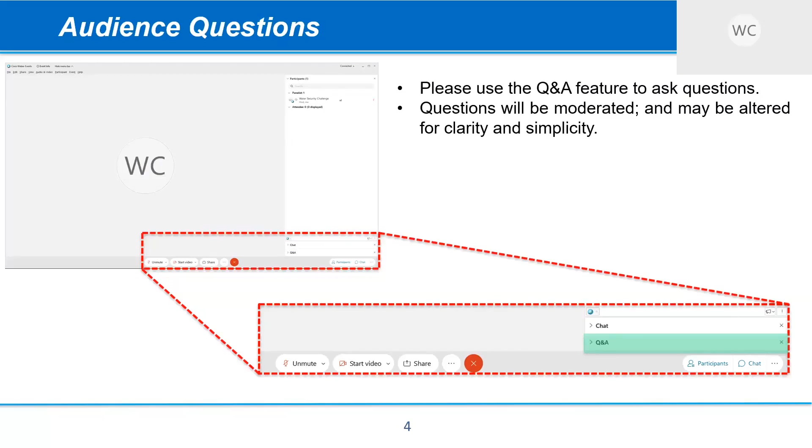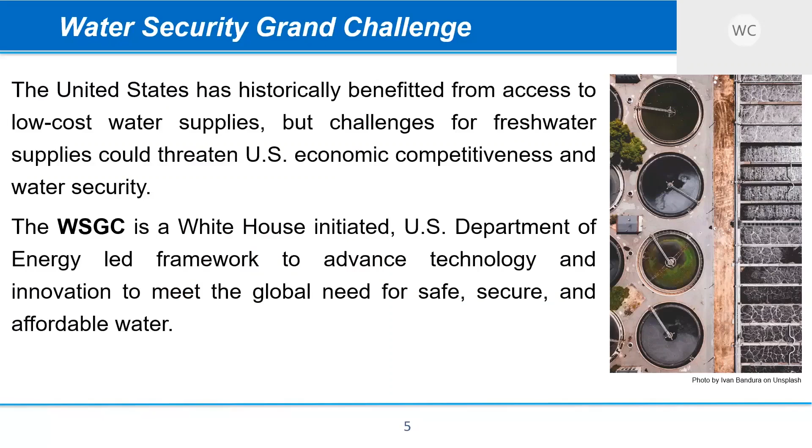Briefly, the Water Security Grand Challenge: the United States has historically benefited from access to low-cost water supplies, but challenges for freshwater supplies could threaten U.S. economic competitiveness and water security. The Water Security Grand Challenge is a White House-initiated, U.S. Department of Energy-led framework to advance technology and innovation to meet the global need for safe, secure, and affordable water. Using a coordinated suite of prizes, competitions, early-stage research and development, and other programs, the Grand Challenge has set goals for the United States to reach by 2030.

Those goals include cost-competitive desalination technologies, transforming produced water from a waste to a resource, reducing water impacts at new and current thermoelectric power plants, doubling the resource recovery from municipal wastewater, which is what we'll be discussing today, and development of small modular energy water systems.

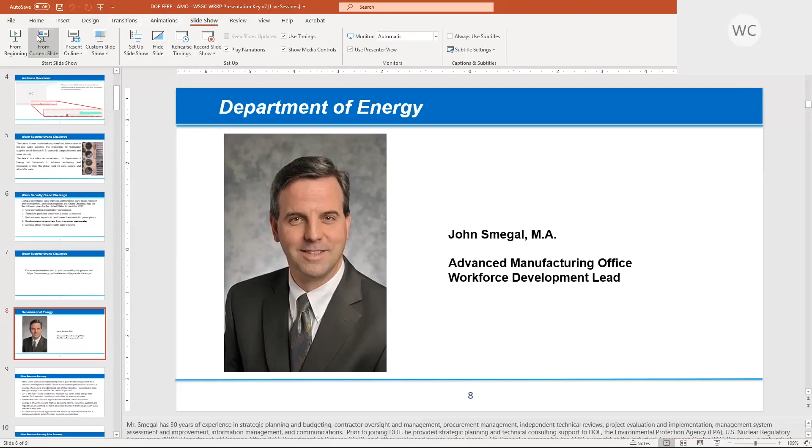Okay, just a second, I believe I have lost partial control from current slide. Apologies, I am having a little bit of technical difficulties. Oh, weird, apologies, just one second. My computer is not allowing me to pass keyboard control. William, if you can't give me control, I can just say advance if that works. Oh yes, that's actually a good solution. I apologize. All right, that works for me, I don't mind.

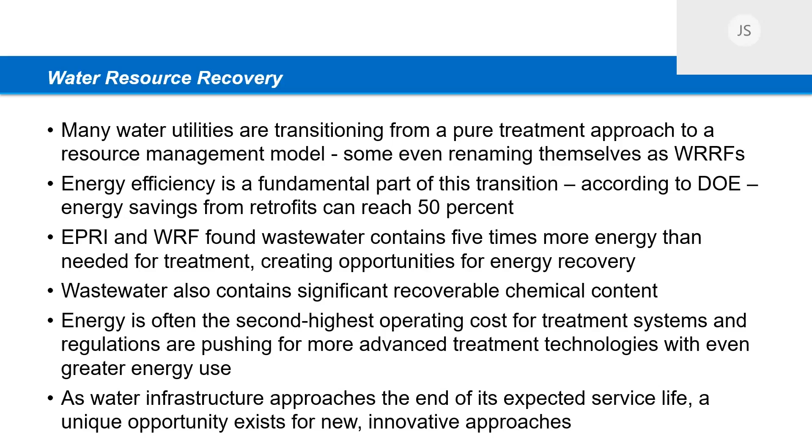Next slide, please. Okay.

The Water Resource Recovery Prize, as you all know, has 2 phases. We've just completed the first one, and that's why you're all here. The first phase is really a conceptual component, aimed at developing a library of solutions—10 winners that can potentially be leveraged or replicated in other settings. Phase 2, which is just getting underway, is more of a demonstration of these technologies, providing an enhanced menu of options aimed at reinforcing and capitalizing on previously discussed emerging trends within the industry.

The prize is looking at small and medium-sized facilities, and this competition has been unique in that it's beyond purely technology-based. Technology is the core of everything, but it's about expanding the technological feasibility outside the fence line of the facility itself. So we're talking about bringing in teams that represent all of the stakeholders, including downstream demanders, utilities, agricultural interests, municipalities, engineering firms, and universities. All of these were desired components of this phase 1 competition.

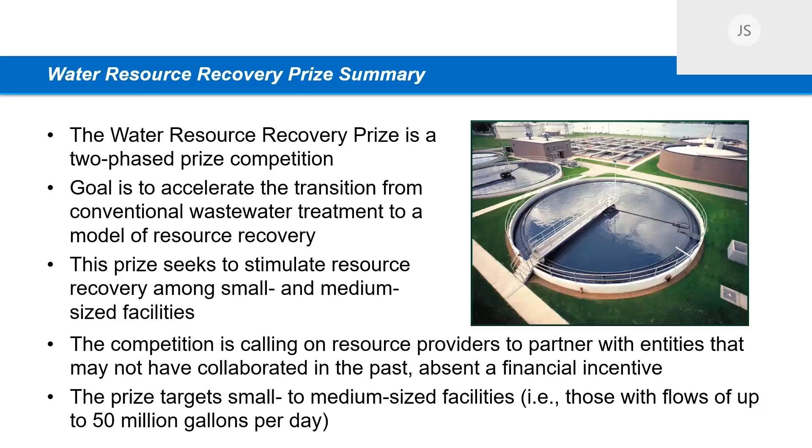All right, next slide, and this is my last slide. As you all know, we're right at that junction. We've gone through phase 1. COVID admittedly caused some delays in how we did this, but we're doing the best we can. So the timeline may be a little more delayed than originally envisioned, but right now, here we are in September, and we've passed that junction, moving toward phase two.

The phase two rules were released, I believe, on September 9th, and we're looking forward to a good process for the upcoming year. And at this point, I am going to turn it over, William, to whomever is next. Thank you, John. Much appreciate it.

Okay, next up we have Lauren Greenlee.

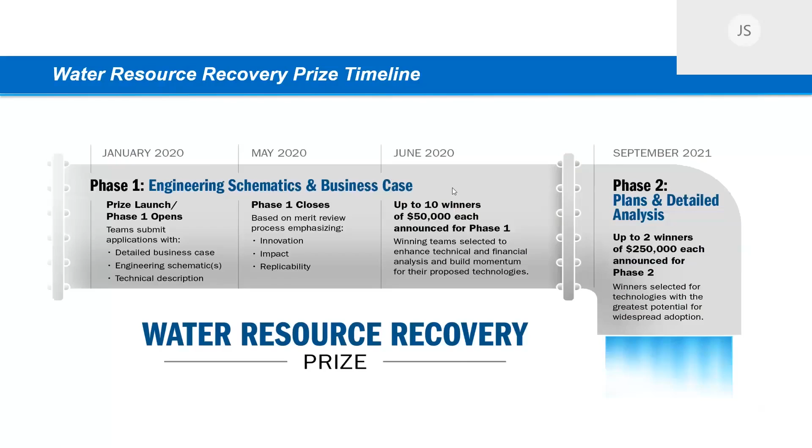I am finally able to pass over controls. Just one second. Okay, I think I have control. Let's see. Any luck? No, neither with my mouse or keyboard. Huh, okay. Oh wait, I think you now do. Oh no, I do. Okay, great.

Great, well thanks. It's exciting to be here as a phase one winner and to talk about my team and the technology that we're focusing on. So our technology is an electrochemical technology where we're focused on recovering fertilizer from nutrients as well as fuel and energy and water.

So the problem that we are focused on is the fact that in our current municipal wastewater facilities, phosphorus and nitrogen compounds come in the wastewater and are lost, either released to the environment or removed because they've been considered contaminants—really similar to what John was saying. So we've spent the last few years rethinking phosphorus and nitrogen as critical nutrients that we spend a lot of energy and money making into fertilizers, and then they're just lost to wastewater.

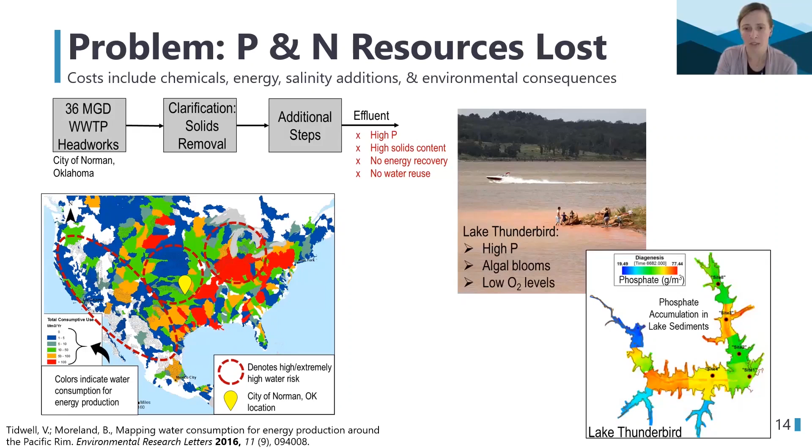So we're focused on the city of Norman in Oklahoma as our test case, and you can see in the slide I have a map here that shows water consumption across the U.S. for energy production, and also areas in the U.S. that have a high water risk right now—the city of Norman is in one of those areas.

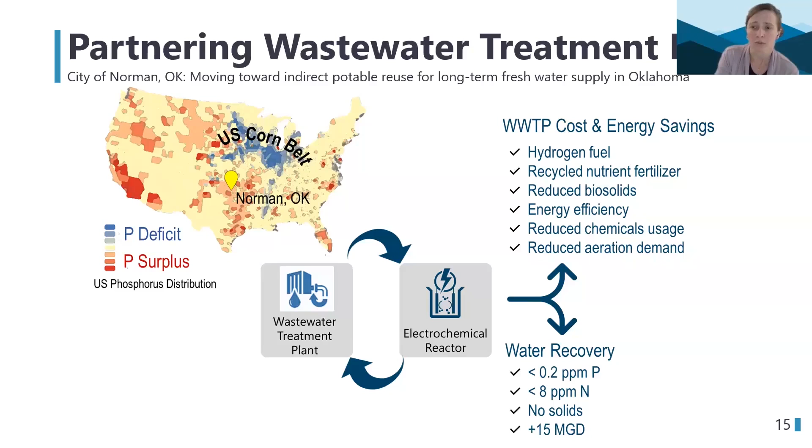So a little bit more about Norman. They are an aging wastewater treatment plant looking to upgrade, considered a medium-sized wastewater treatment facility in the central U.S. where there's a surplus of nutrients that would be good to recover, both phosphorus and nitrogen. We see a lot of benefits for our potential technology in terms of water recovery, and also cost and energy savings. I'll talk more about that in terms of resources recovered.

Other significant benefits of our technology are that we also produce hydrogen, which can be recovered as a fuel during our electrochemical process. Because we use electrochemistry, we replace the need for chemical addition typically used for nutrient removal. So we're reducing added salinity that's typically added to remove nitrogen and phosphorus in more traditional approaches, and we also reduce overall chemical usage as a cost to the wastewater treatment plant.

And certainly another huge benefit is that we're going to be enabling a huge recovery in treated water for indirect potable reuse for the city of Norman as a new drinking water source.

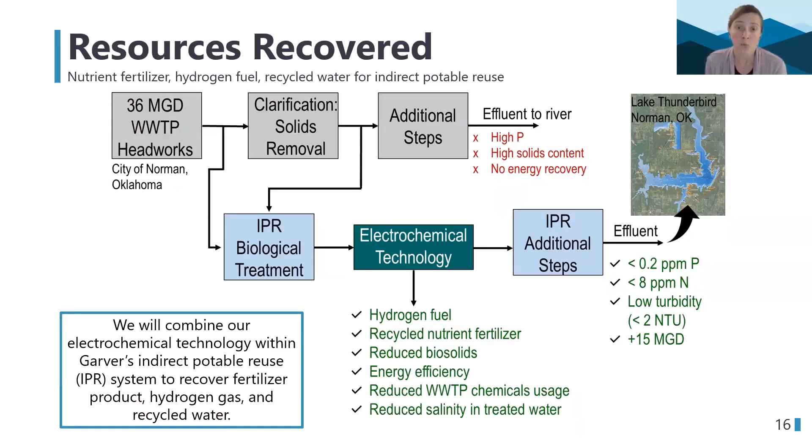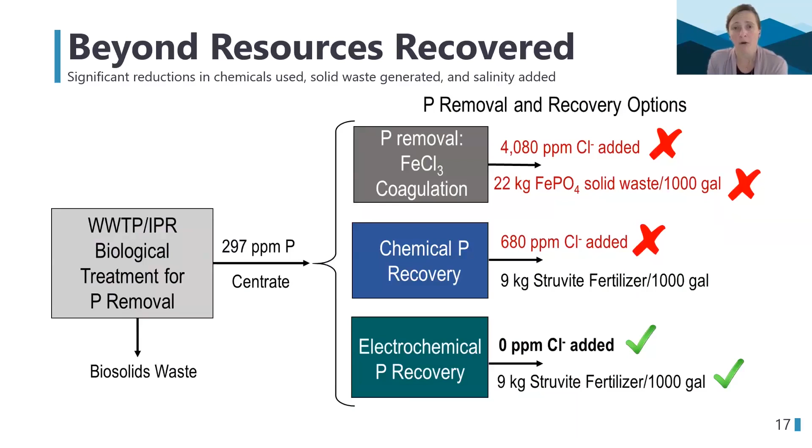Just a little bit about our team. I am the team lead, co-founder and CTO of Catalyze H2O, a startup company looking at transitioning this technology out of our research lab. I'm also a professor at the University of Arkansas, where we originally developed this technology at lab scale.

My co-founder for Catalyze is Shelby Foster. She's the CEO and will be leading business development and the market business plan. We are partnering with Mike Watts and Sean Skouras from Garver, consulting engineers directly involved with the City of Norman and their indirect potable reuse project. We're also partnering with Chris Mattingly, Director of Utilities for the City of Norman. We'll be working closely with all team members for phase 2.

And with that, a huge thank you for listening, and I look forward to any questions.

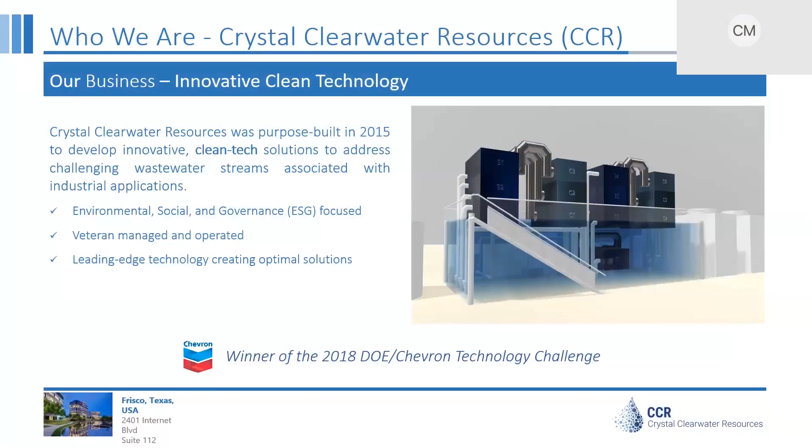Good morning, my name is Casey McKinney, VP of Operations, and I'll be presenting today for Crystal Clearwater Resources. CCR is a veteran-managed company purpose-built in 2015 to address some of the most challenging issues related to wastewater treatment across multiple industries. We help companies fulfill the environmental aspect of their ESG standards by creating optimal solutions through leading-edge clean technology.

CCR's proposal is in partnership with Ramona Municipal Water District, Dudek, and Southern California Alliance of Publicly Owned Treatment Works, or SCAP. CCR proposes using our patented low-temperature distillation, or LT-DIST, technology to improve upon multiple aspects of the existing resource recovery process. Integrating our technology will increase the amount of recovered water available for reuse by nearly 100%, and reduce current disposal volumes by approximately 90%. This reduction will eliminate an estimated 17,000 truck miles per year, significantly reducing the risks and environmental impact associated with transporting brine to the Point Loma ocean outfall.

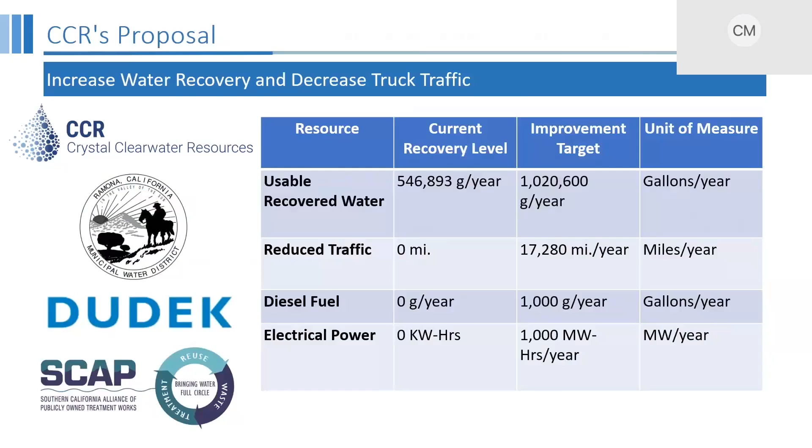The San Vicente wastewater treatment plant currently utilizes reverse osmosis, or RO, as a component of their treatment process, which recovers approximately 550,000 gallons of reusable water per year. Integrating LT-DIST technology into the current treatment process will concentrate the existing RO waste stream, providing increased water recovery and decreased disposal volumes. This will result in lower disposal costs and lower greenhouse emissions from the disposal process.

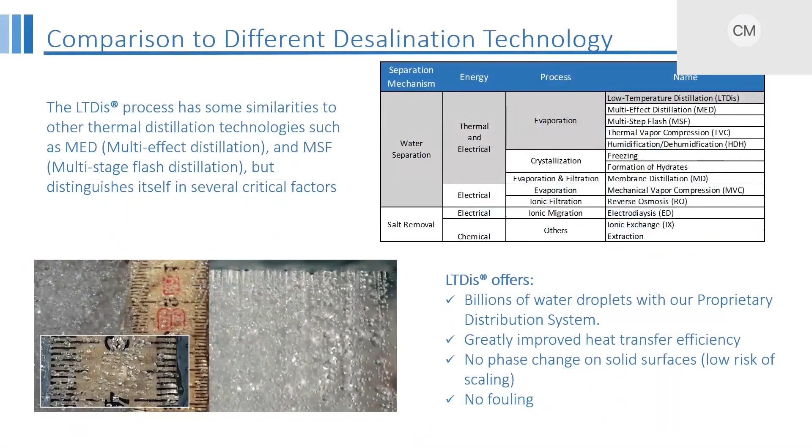Our proposal also requires a microturbine generator to drive the thermal process, which will provide all the required electricity for the LT-DIST plant. Excess electricity can be used to augment a portion of the electrical demand from the existing treatment process. What differentiates the LT-DIST technology is that the phase change in the evaporation process occurs on billions of water droplets instead of tube bundles or membranes.

With no phase change on metal surfaces, this virtually eliminates scaling and fouling risk within the plant. Additionally, the droplets in the condensation process allow for more efficient heat transfer.

Our technology operates under vacuum and is tolerant to fluctuating wastewater streams of up to 300,000 parts per million, requires little to no pretreatment, and operates efficiently under both full and partial load conditions. CCR's plants can utilize various heat sources ranging from conventional boiler systems to both low and high-grade waste heat to drive our thermal process.

LTDIS is a step change technology from existing thermal distillation processes that promotes seamless integration between other wastewater resource recovery facilities. Plant size can be scaled up or down to meet a facility's requirements. Our vertical design and lack of tube bundles allow for a significantly minimized footprint, making LTDIS ideal for smaller applications where space is restricted.

The standardized and modular design allows operators to be familiar with the systems across multiple facilities. Our technology augments an already robust system by allowing standardization in maintenance, personnel training, and plant equipment and supplies.

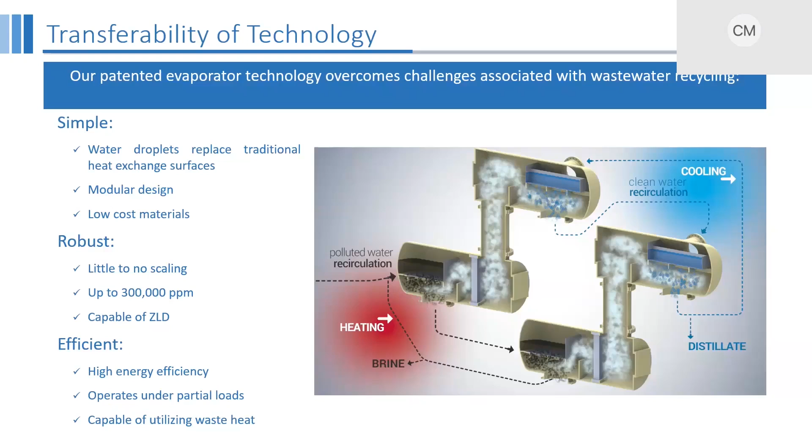While not economically viable at a location the size of the San Vicente facility, integrating our patented low temperature drying, or LT Dry, technology with our LTDIS system, we can achieve zero liquid discharge, or ZLD. Combining these two technologies eliminates the need for brine disposal, resulting in a full separation of water and solids and potential recovery of other valuable minerals for reuse.

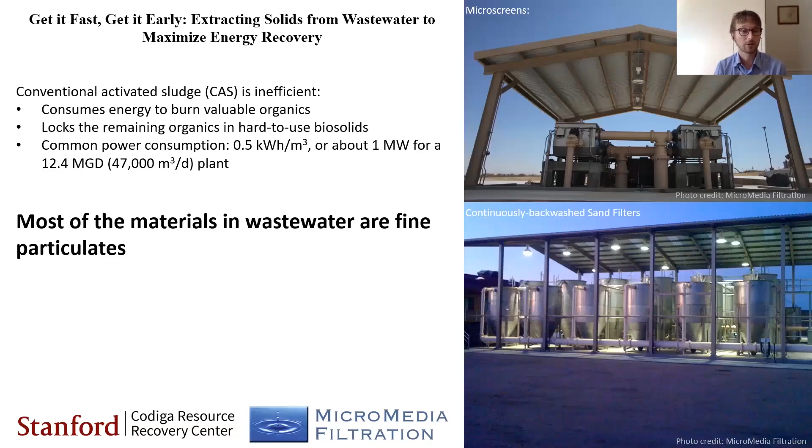Our approach that we're pioneering here is to really aggressively remove particulate matter from the wastewater upstream as soon as you can, essentially. Hence the name, get it fast, get it early.

We're relying on two processes to do that. The first is this process you see on the left, called a microscreen. For wastewater professionals, that's a machine similar to a gravity belt thickener, but you use a screen with a porosity that can vary, though up to 300 microns is typical. The water filters through the belt, and you intercept the solids, which form a mat on the screen that promotes even greater filtration.

You can extract the solids and dewater them, while the water flows on to the next process, a continuously backwashed upflow media filter. In this system, water flows continuously up through a bed of sand, while the sand is constantly flowing down. This allows us to continuously clean the sand and achieve essentially optimal filtration throughout the process.

These sand filters were previously certified in the New York City watershed as achieving equivalency to microfiltration, so you can achieve a very high degree of filtration upstream of your process, which makes everything else simpler and more energy efficient.

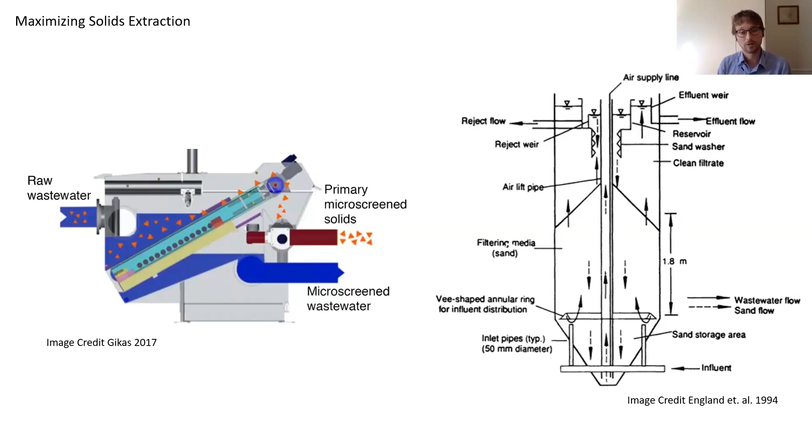To show the full process flow diagram on the next slide of a typical treatment plant, you'd have your wastewater coming in with bar screens, grit removal, and then a primary clarifier, which achieves about 50% typical solids removal. So you're still sending a lot of solids into your biological treatment process that still need to be removed.

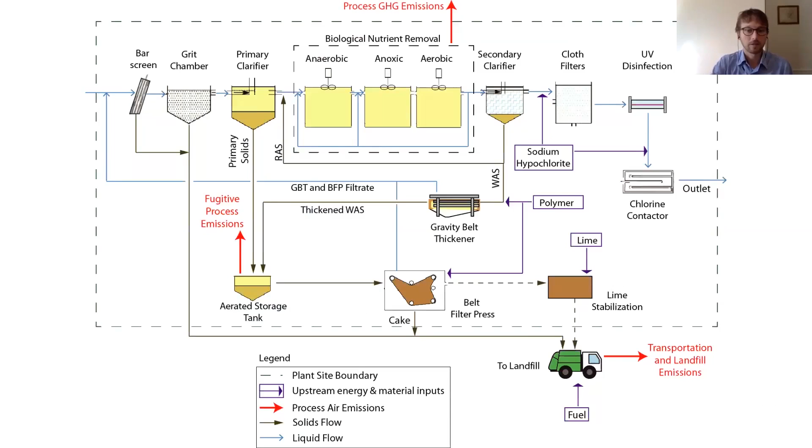By contrast, the treatment process we're proposing relies on a microscreen and then a primary filter, this advanced primary filter, to dramatically increase the amount of solids diverted and sent to solids handling. This is important because your solids have energy and resource value, while the highest value of your liquids is in the water.

After flowing through the primary filter, we have a moving bed biological reactor that can operate much more efficiently than a typical biological treatment process because the solids are essentially gone. You're using biological treatment to treat the soluble fraction of material, so you can achieve much smaller hydraulic retention times and much more rapid treatment.

Following that is a tertiary filter, similar in configuration to the primary filter, and disinfection. What's interesting about this configuration is that by minimizing the amount of secondary biosolids you produce, you dramatically improve the dewaterability of those solids, and improve the thermodynamics of energy recovery from them.

So we can send the solids separated from the wastewater through an auger press to dewater them, a grinder, and then a flash dryer, creating a dry powder that can be burned in a conventional solid fuel biomass burner to produce steam to drive a turbine. The waste heat should be sufficient to drive the drying process, yielding excess production of process heat and electricity as valuable resources.

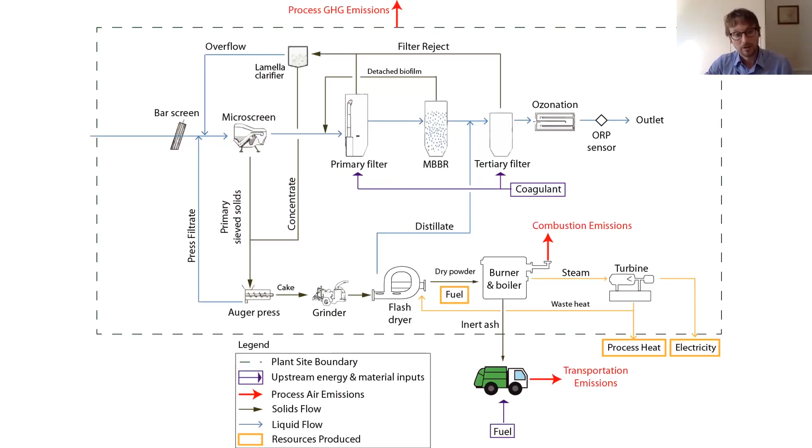So if you can proceed to the next slide. High-level punchline benefits of a system like this: you could completely flip the energy balance of a treatment plant from being a substantial energy consumer to being a green power plant.

For about a 12 MGD plant, instead of consuming about a megawatt of power continuously, you would be exporting about 540 kilowatts to the grid. With this technology, because filtration allows you to dramatically reduce the size of any biological treatment, you can reduce the plant footprint by about three quarters, and reduce solids production by 96% because you'd be hauling off ash instead of a wet material that's mostly water.

The team helping develop this approach - I'm participating as part of the Stanford Codiga Resource Recovery Center. We have two private companies, Micromedia Filtration and Gate 5, and we're collaborating with the Puerto Rico Aqueducts and Sewer Authority, PRASA, to try and deploy this technology or test it in Puerto Rico.

And I think that's the conclusion of my presentation.

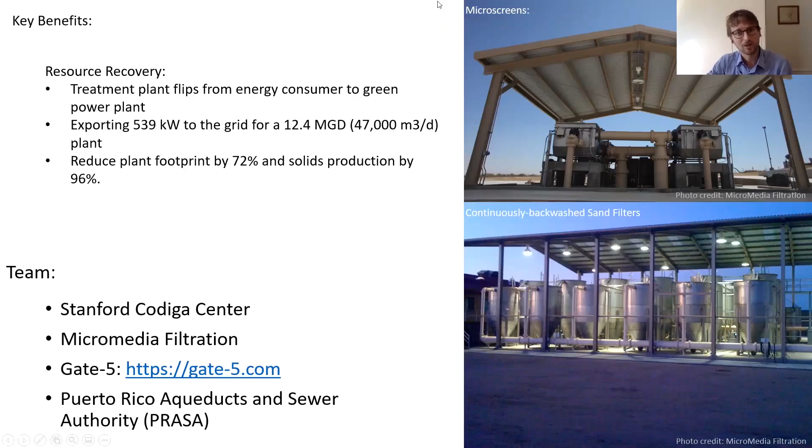Hi, thank you. So I'm the CEO of Impact Bioenergy, a professional civil environmental engineer, certified for quality and organizational excellence, and we also are the owner, operator, and beneficial resource manager for distributed anaerobic digesters.

And let's advance to the next slide. Well, that's the cover the other way. So Impact Bioenergy has about 10 years of experience

in applying traditional anaerobic digestion to small, distributed, in almost all cases modular and prefabricated digestion systems. The focus has been on urban food waste, craft beverage manufacturing, and food manufacturing, and now with this new project, our phase one, we've pivoted back into the wastewater industry to merge our experience with other non-traditional feedstocks and look at co-digestion. So our skill set is to build modular, prefabricated, fast deployment digesters.

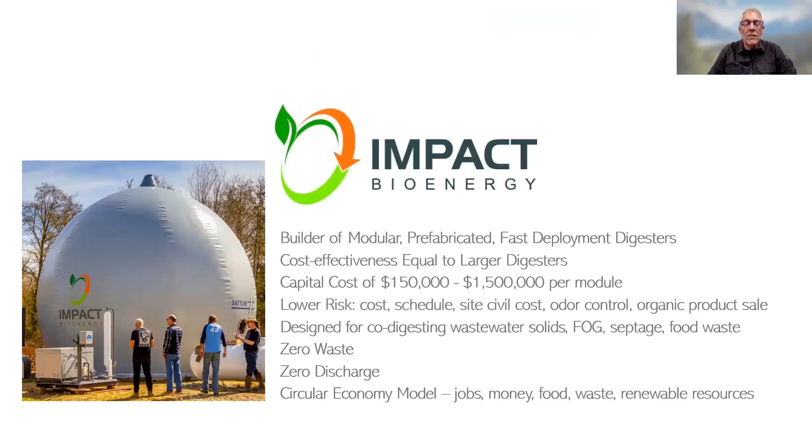Our partner is Tenino, Washington, a town of 2,000 people. The wastewater flow is only 150,000 gallons per day. It's an MBR process with a lagoon storage system, and their effluent goes into a groundwater recharge system. This is a very small community, but there are 16,000 POTWs in the United States, and only 1,400 of them now have digesters. So what's really driving our aspiration is bringing down the primary barrier to digesters: high capital costs for smaller to medium-sized facilities.

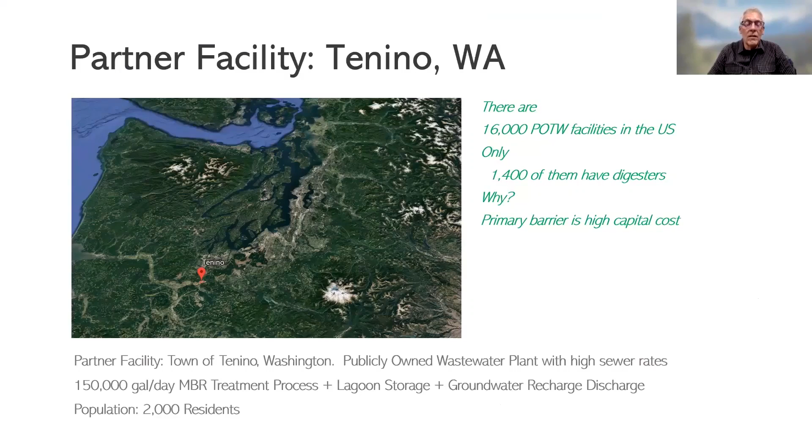Next slide, please. So the project we advanced in phase one was called an Integrated Bioresource Recovery Project, and the objective is to prove cost effectiveness using a small to medium scale approach.

We have two branded digester systems: the Horse, which is smaller, and the Nautilus, which is larger. They're modular systems that serve between 500 and 30,000 people each. Impact has completed 14 of these systems, logging 130,000 operating hours, so we are in the commercial phase with this technology. The proof of concept is strong.

We have zero odor complaints with 130,000 operating hours, and the labor input is very small. Proof of concept is also strong with the beneficial use of all the co-products. In many cases, regional digesters are looking at the digestate as an operating expense, and we are pushing that to a new paradigm where the organic output and the liquid become a commercially valuable product. The technology is suitable for co-digestion, meaning sludge, food, FOG, and septage.

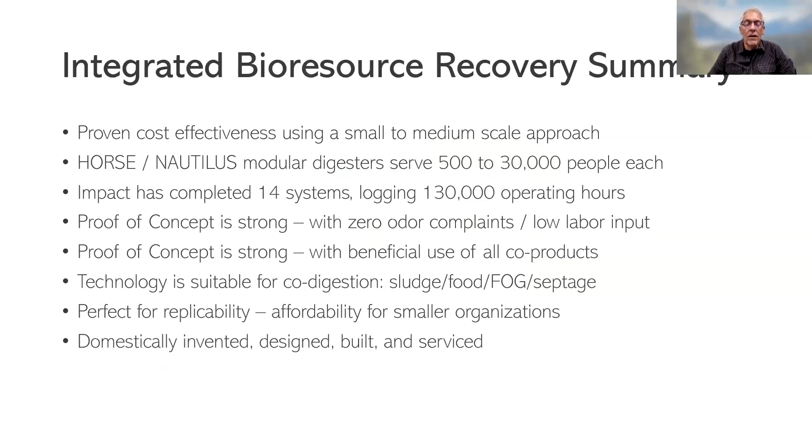It's perfect for replicability because it's affordable and we can prefab these. They're easy to ship, easy to deploy, and in some cases the install will be a one-day experience. Domestically, it's invented, designed, built, and serviced in the U.S. This technology was born in the Pacific Northwest, and we now have facilities across the country with 14 systems already deployed.

Next slide, please. Briefly, what this will do is take the existing treatment plant, shown in the dashed box at the bottom. This will require a new receiving station for septage and food waste. It will go through feedstock preparation, then through a digester, then into Class A solids after pasteurization, or PFRP. The local county is also a partner in this because they have an economic development agricultural park adjacent to the wastewater plant, so we're actually partnering with the city and the county.

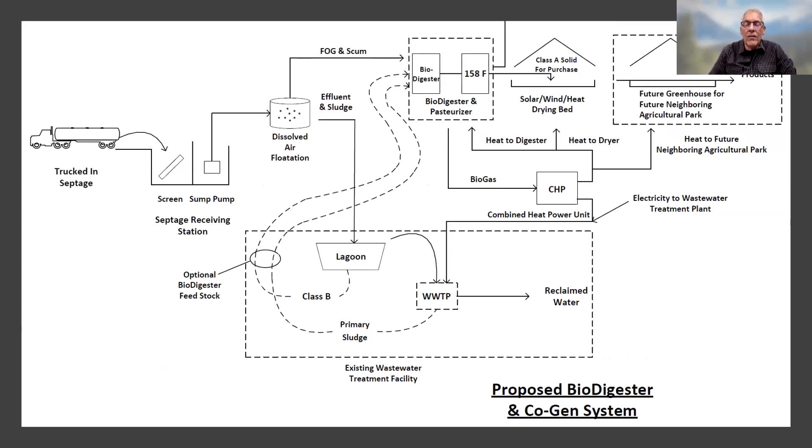It is a net energy producer, which is part of the backup, but the energy is only half the story. The organic outputs are the other half. This is a graphic of how this works, and one of the reasons we can do this is we are eliminating a tremendous amount of diesel fuel and trucking and transportation. All of this is co-located at the wastewater plant, and it also supports some of these local businesses. There are a number of cases where food or beverage manufacturing is causing problems for existing wastewater infrastructure, and we're directly addressing that.

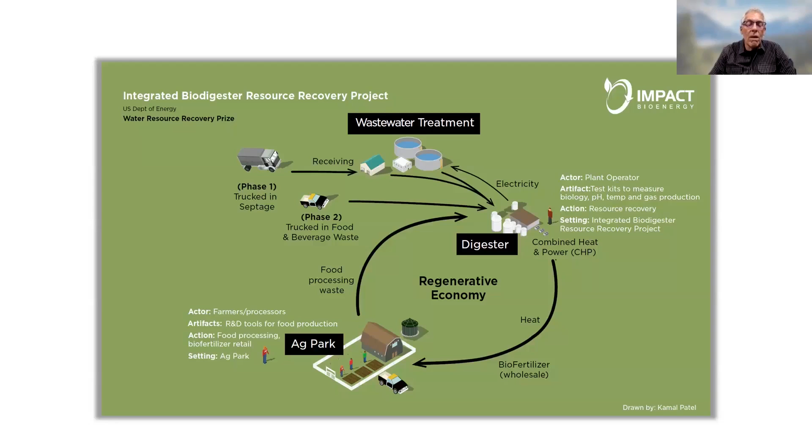And then the organic products go out as a liquid, and we dehydrate them to make a blended fertilizer. In many cases, we're being integrated with a farming system to take the organic outputs from the digester right into food production on site. So it's beneficial use of all the resources that come out of the digester, and it simultaneously improves air, water, soil, climate change, and the job market, touching all of these simultaneously. Plus, the community becomes more resilient and independently sustainable.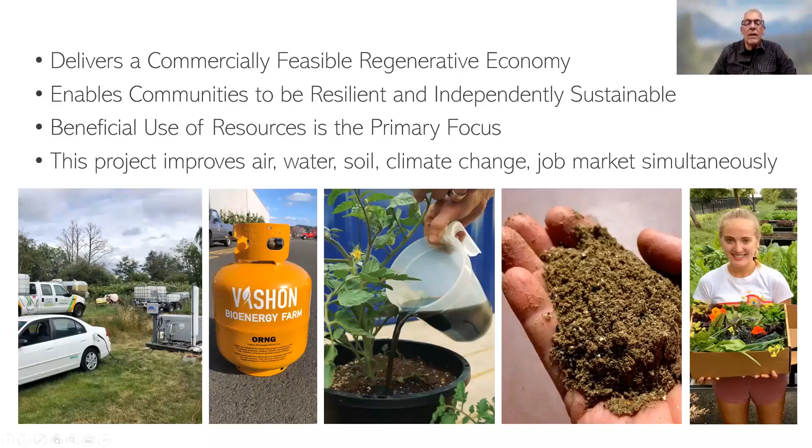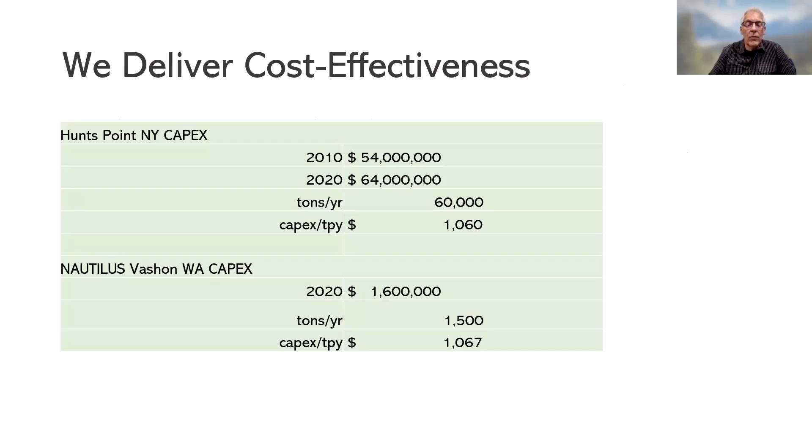Next slide, please. So, cost effectiveness: this is surprising, but we've been at this for 10 years trying to microscale digesters. It's a huge lift for us, but this does show that we compared our Nautilus, which is 1,500 wet tons a year, to the Hunts Point digester design report from 2010, and we are exactly the same capital cost per ton per year of input, which is the metric we use. So the economy of scale argument really does not hold water, so to speak, when we deploy these systems. We're equal to the larger systems in benefit cost ratio.

Next slide, please. So we're matching effective... Apologies to interrupt, Jan, but due to timing I have to cut you off.

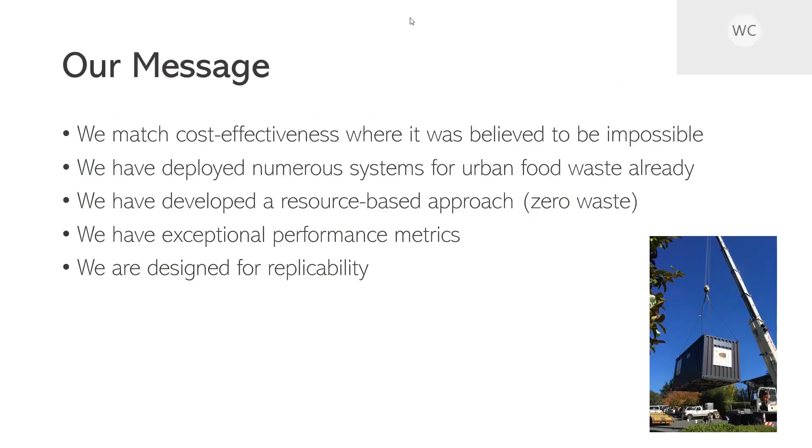I apologize for that. But yeah, please have a second to take a look at this slide, and I think this may be the last one. Yeah, that is. Thanks, and thank you so much again for your talk, Jan.

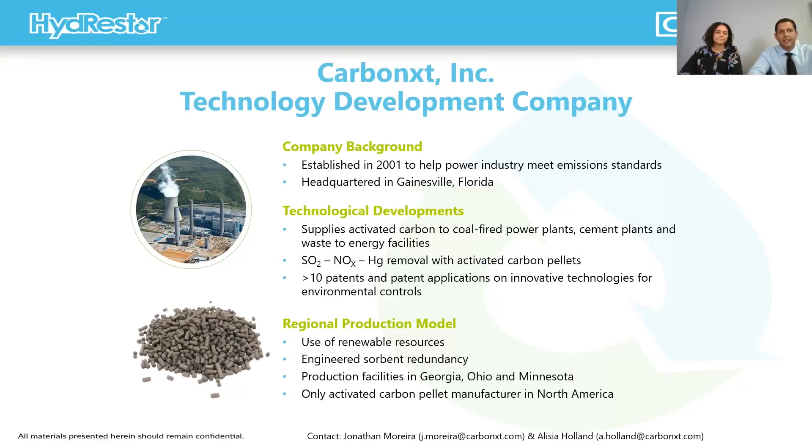With our headquarters in Florida, it's only natural that we take a keen interest in the ongoing water impairment catastrophe we've had here over the last few years with the blue-green algae blooms. The primary driver for this ecological disaster is the discharge of excess nutrients, both phosphorus and nitrogen, to our local waterways. The source of this discharge includes, but is not limited to, excess fertilizer from both agricultural and residential sources, along with wastewater and stormwater runoff.

The nutrient loading of a body of water is one of the factors that we use to determine the health of the local ecosystem.

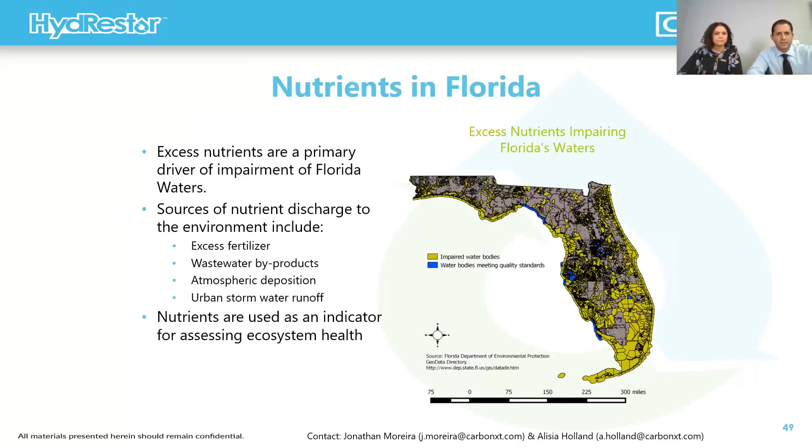To attack impairment of our local waterways, Carbonxt has engineered a sorbent with enhanced phosphate sequestration capabilities. Its ability to both adsorb phosphate in application and subsequently be recovered and reused as a soil amendment makes this a doubly environmentally friendly solution.

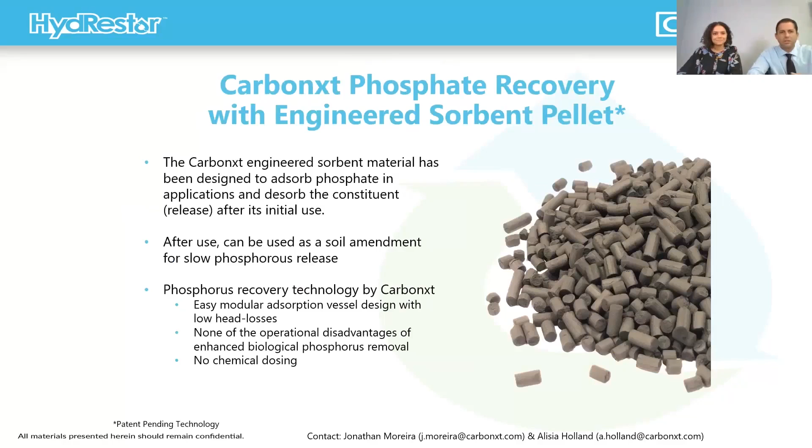The solution we're talking about is HydRestor. Additional advantages of our HydRestor technology versus traditional biological treatments include a much smaller footprint for our treatment vessels, an improved ability to handle fluctuations in influent nutrient concentration, as was asked earlier about seasonal fluctuations, and a reduction in system head loss.

Couple these advantages with the copious other benefits throughout the media life cycle, and you have a bona fide solution to excess nutrients. Alisia will now delve into the pilot testing and results.

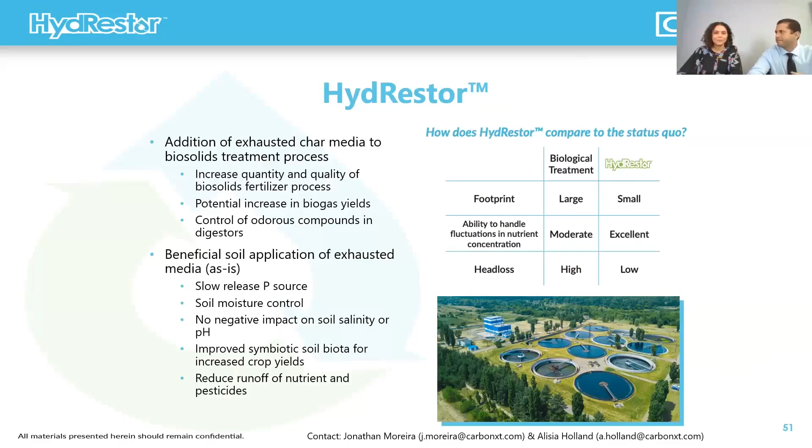Again, my name is Alisia. I work in research and development at Carbonxt, and I'm excited to present some early results on our partnership using HydRestor with Braden River Utilities. Braden River Utilities, or BRU, is a private utility that serves the Lakewood Ranch community in Southwest Florida, which straddles Sarasota and Manatee counties.

They're contracted to receive up to 19 million gallons per day, or MGD, of reclaimed wastewater from the cities of Sarasota and Bradenton, as well as from Manatee County. However, the water from Manatee County does not meet the Advanced Wastewater Treatment Standards, or AWT standards. At scale, this project will process at least 1 MGD of non-AWT reclaimed water from Manatee County before storage and distribution, at a construction cost of about $1 million. This cost will be shared between BRU and the Southwest Florida Water Management District.

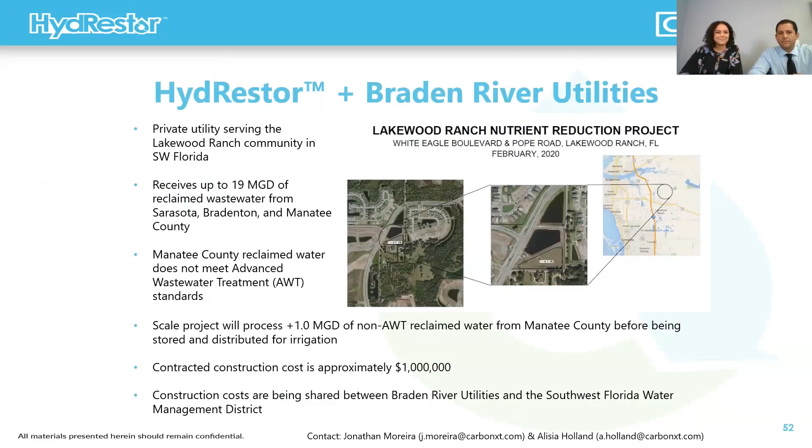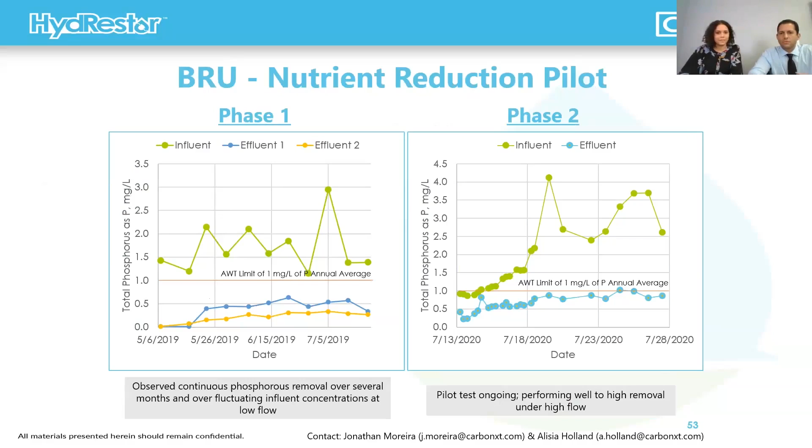You may be thinking, where can I fit this technology into my existing treatment plant? I think that's half the magic. Our media does very well in modular vessels as well as in cast-in-place structures, and it is designed to be placed downstream of secondary treatment and upstream of disinfection, but this is highly customizable to suit your needs.

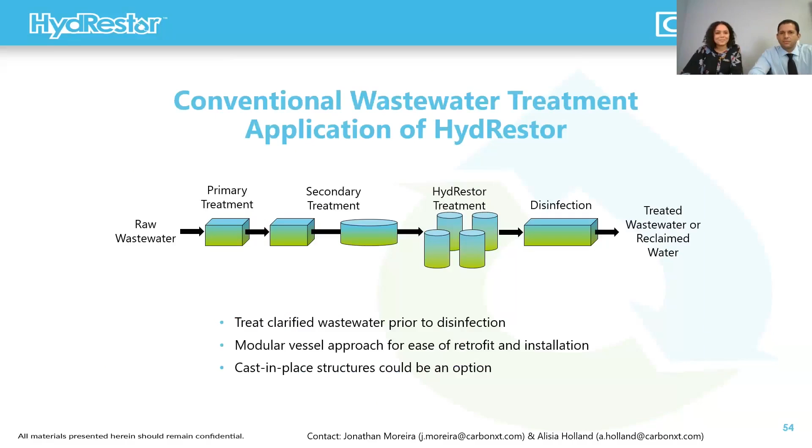So Carbonxt is currently pursuing pilots to gather additional performance data as well as to inform full-scale design, and our initial focus has been heavily trained on wastewater treatment plants. We've got 3 pilots identified: the BRU phase 2 is underway, and 2 are under construction. But we're looking to expand our outreach to other markets, including stormwater runoff, sugar farms, food and beverage, and other industries. And I would like to note that we are aggressively seeking partners on pilots, as well as for ongoing commercialization efforts.

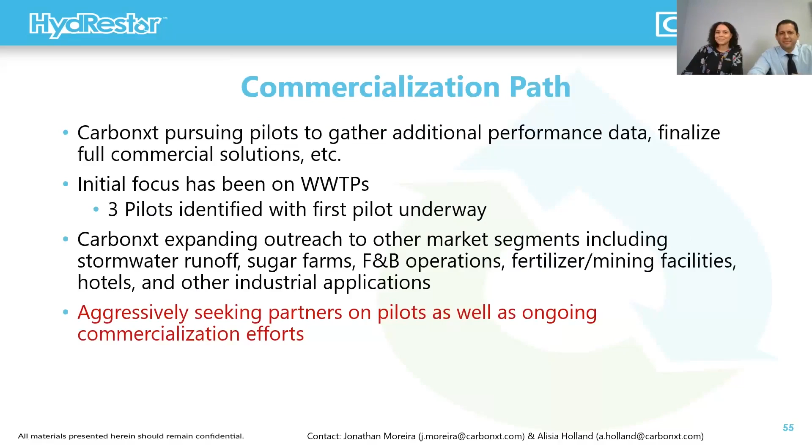So if you have a phosphorus problem, please take down our information, and we look forward to hearing from you. Thank you.

At SoMax, we spent the last 8 years developing the HTC technology, and we've created partnerships not only with Villanova University School of Sustainable Engineering, but with the borough of Phoenixville as well. We brought together a team of industry and academia experts on biomass transformation and on wastewater treatment and resource recovery. Next slide, please.

So the problem we're identifying is not only with wastewater treatment, but in organic waste in general. The hundreds of millions of tons of organic waste that we produce every year as a nation have really 3 solutions existing: landfilling, composting, and anaerobic digestion. Now, the problems with these existing solutions are that they're not very efficient and they require lots of land to process the material. As you can see, composting and anaerobic digestion are only 10 and 50% carbon efficiency.

They're basically only recovering up to half of the carbon that's in the feedstock, and they take weeks to months to process the material. Next slide, please.

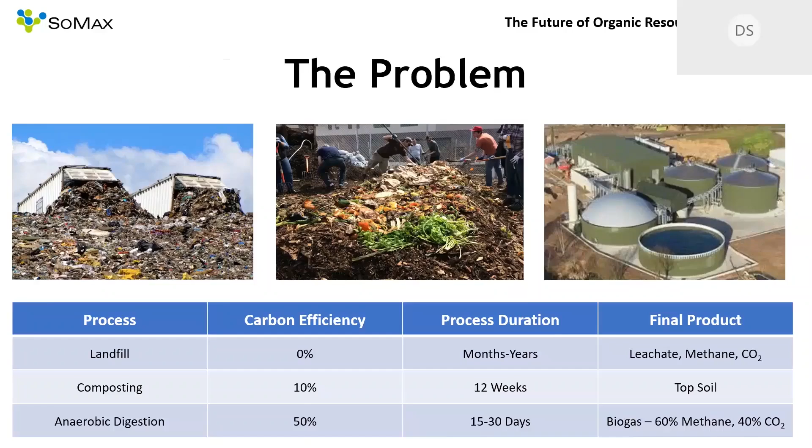So with hydrothermal carbonization, we solve these issues. HTC is a thermochemical process that mimics natural coal formation. But rather than the hundreds of millions of years that Mother Nature takes, we accomplish this feat in as little as 30 minutes to 4 hours.

We do this by applying mild heat, same temperature you would bake cookies at, around 375 degrees Fahrenheit, and mild pressure. This keeps the wet material in a pressurized state that actually breaks molecular bonds of the waste material so that we can separate out and recover all the elemental components of that waste material, regardless of what it is. Next slide, please.

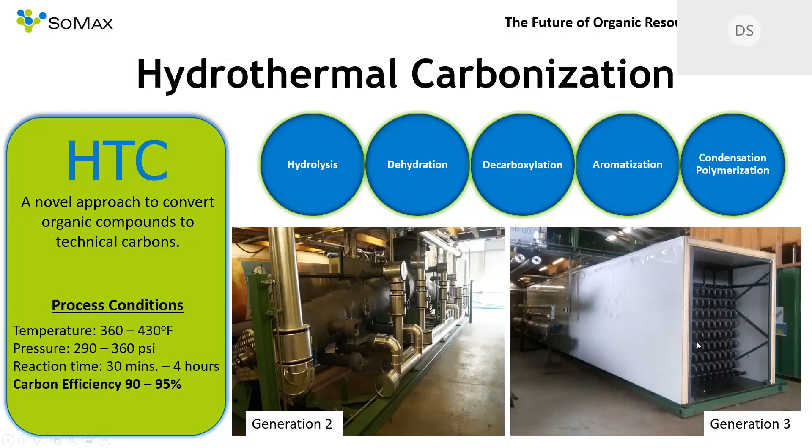We're creating 153% of the electrical demand of the wastewater treatment plant. That excess energy will be used within the borough to run borough facilities. It'll also run streetlights and stoplights. We'll get them to about 90% renewable energy and save them $1.8 million a year based on material that they were just throwing away. In addition to that, we have a carbon efficiency of 90%.

We also have the lowest greenhouse gas emissions of any biomass conversion process. We're able to increase their solids handling capacity by 10x without increasing the plant footprint at all, and we're able to dewater the hydrochar material over 50% without any polymers. In addition, we're creating pathogen-free sanitary products that eliminate or destroy pharmaceuticals, antibiotics, and PFOAs, or forever chemicals. Next slide, please.

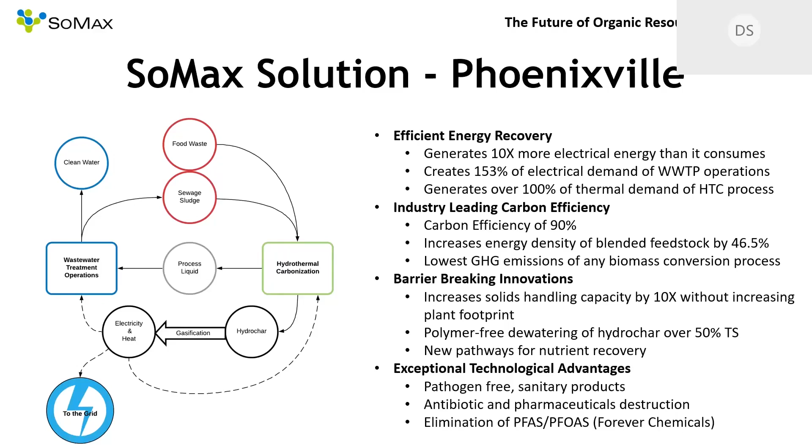So our baseline solution of products out of HTC are a hydrochar, which is a coal-like substance that can be used directly as a soil amendment, and a liquid product that's a nutrient-rich process water that can be used as a fertilizer. Various post-treatments, both on the solid and the liquid side, allow us to extract additional nutrients in the form of ammonium sulfate, nutrient concentrate, and then provide distilled water.

On the solid side, we can activate that hydrochar to become activated carbon. We can gasify it for renewable energy and ash, and then we can recover phosphorus from the solid component. Next slide, please.

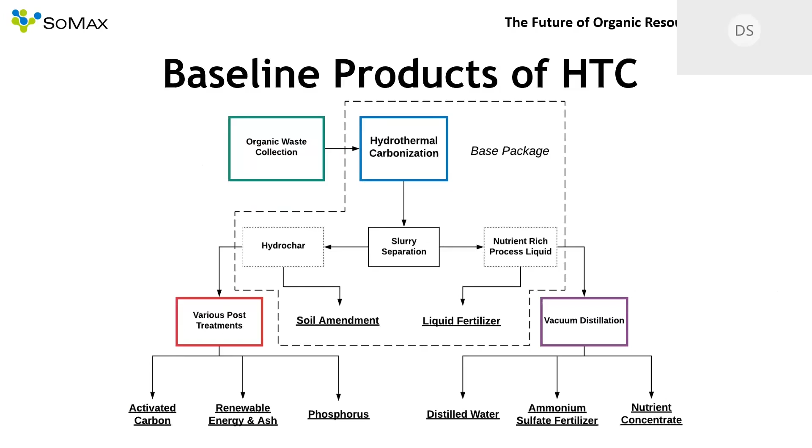So beyond just power generation, what we're doing at Phoenixville, we have a variety of products that we can create from the solid side that act as a carbon sink. Everything from batteries and supercapacitors to activated carbons, graphenes, carbon nanotubes, in addition to sustainable building materials. Anything that's not used as energy acts as a carbon sink, allowing us to pull down carbon emissions from the atmosphere, or keep them out of the atmosphere, and sequester them for a long period of time. Doing this at scale has the ability to sequester gigatons of carbon every year.

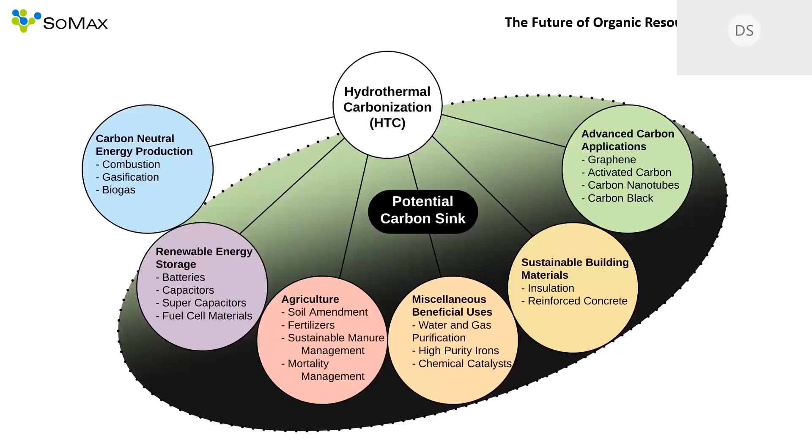So the HTC process is really a bolt-on process at any wastewater treatment plant. We intersect directly at the biosolids or the solid separation, so we don't interrupt the treatment plant process at all. We're not acting to go in front of any component, we're at the back end of the treatment plant. We put in our system to bolt on, and this not only functions at wastewater treatment plants, it can be installed at landfills, transfer stations, anaerobic digestion plants, farms, or compost facilities. So this would apply across the country at any wastewater treatment plant. We intersect at the point where you dewater your biosolids.

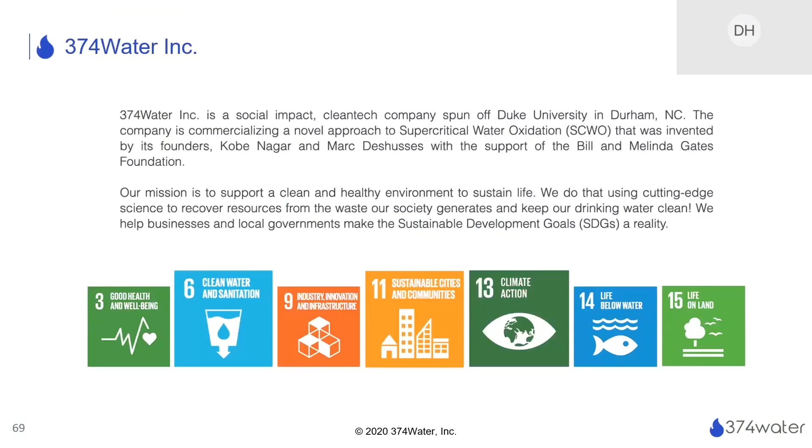What we're trying to do with the supercritical water oxidative technology and with 374 Water is to really shift the paradigm from waste treatment to resource recovery. And as mentioned earlier, we're looking at recovering resources, but more importantly, we're also looking at decentralized modular waste treatment. We're finding, and I think we as a society are finding, that large centralized waste and wastewater treatment facilities may not be the most affordable and most effective way to handle our wastes. Next slide, please.

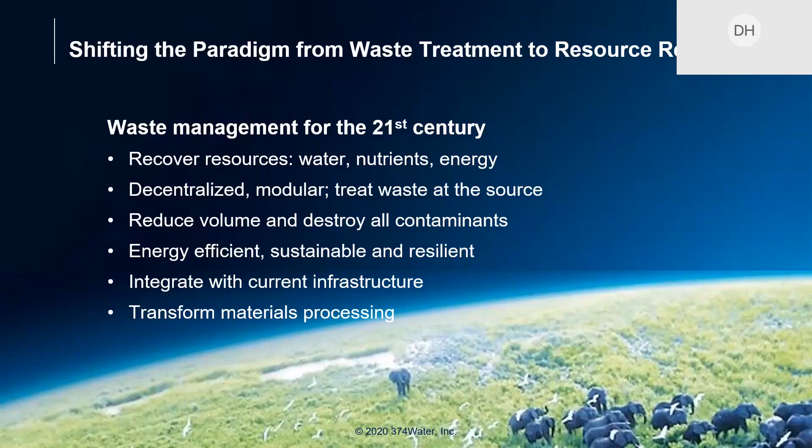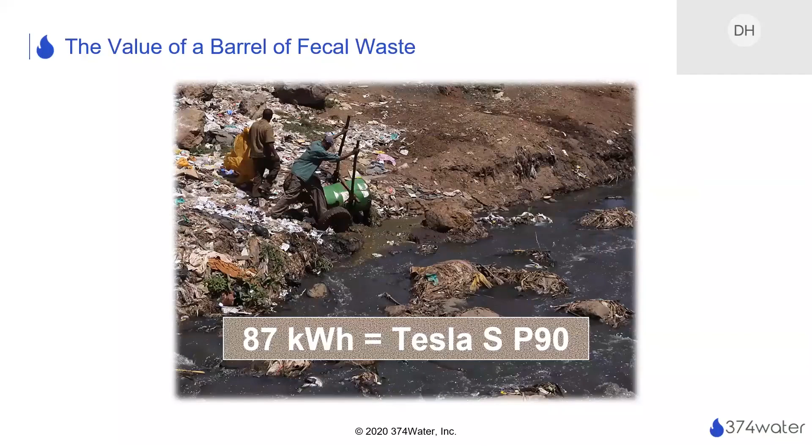So, as mentioned, a barrel of fecal waste contains about 87 kilowatt hours of energy, which is enough to power a Tesla S P90. And as you see here, this is a picture of a developing country, and they're basically pouring all that energy off into the river, which leads to environmental contamination, poor living conditions and health standards, but also we lose the opportunity to reuse that pent-up energy. Next slide.

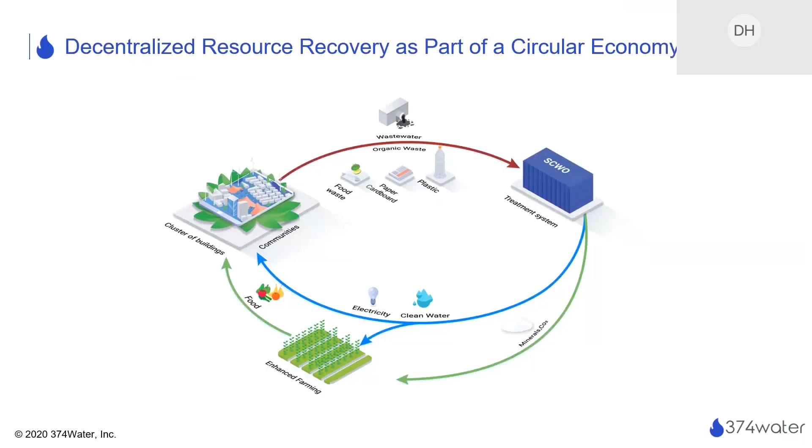What we're looking at with the supercritical water oxidation is contributing to a circular economy where we can take wastewater and organic waste, put it through the system, generate clean water and electricity, minerals that can be reused, which can then be put back into the cycle for enhanced farming and food, as well as providing electricity back into our communities. Next slide.

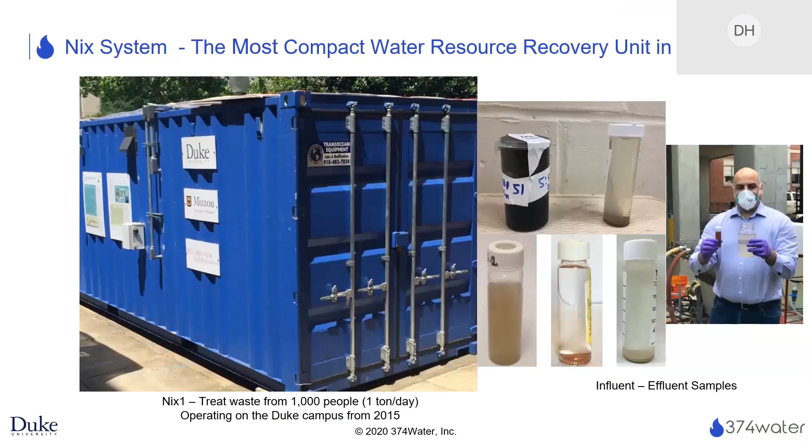Supercritical water oxidation is taking advantage of the unique properties of water when it's raised past its supercritical point, which is above 374 degrees C, about 705 degrees Fahrenheit, and above 221 bar, roughly 3,200 psi. When you have organic waste with air as an oxygen source at that temperature in a reactor, the organics are fully soluble and miscible in the solution, and the oxygen is able to essentially mineralize the organic materials and bring it down to just clean water and CO2. It's an exothermic reaction, so there is electricity that can be generated. That electricity is used to reheat the influent stream in the process, and in larger units can be used to push electricity out to the site for reuse somewhere else on the location. We also create heat, which can be recycled and reused as well, and minerals which can be used for fertilizers and other things. The interesting thing is this all occurs in seconds within a reactor. We're finding this is also very useful in destroying microplastics and contaminants such as PFAS. Next slide.

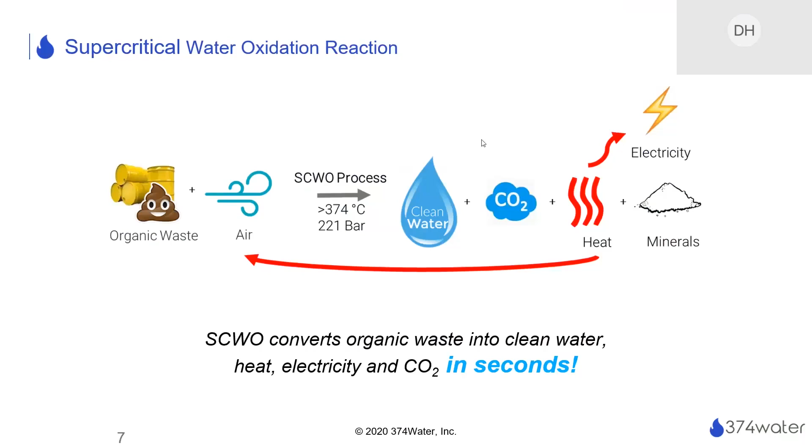We have treated dewatered secondary sludge, primary sludge, waste-activated sludge, food waste, and other wastes such as motor oil, vegetable oil, landfill leachate, plastics, and industrial wastes. The feed streams generally are best when they're in 10 to 16% solids and there's caloric content in the material.

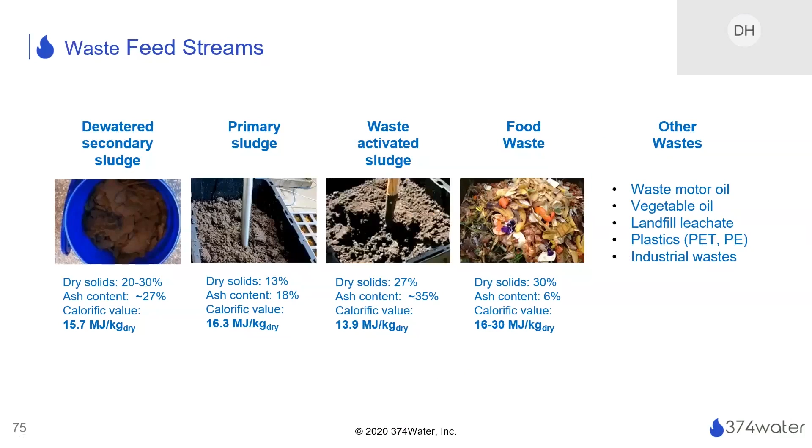Right now, commercially, we're looking at creating 3 commercial units: the Nix 6, at 6 tons nominal per day, the Nix 30 at 30 tons per day, and the Nix 200 at 200 tons per day. We're currently operating, or Duke has, a pilot unit, a Nix 1, operating at Durham, which we use for treatability demonstrations right now. For the Nix 30 and Nix 200, we actually have the generation of electricity, which comes out of the reactors and can be reused elsewhere.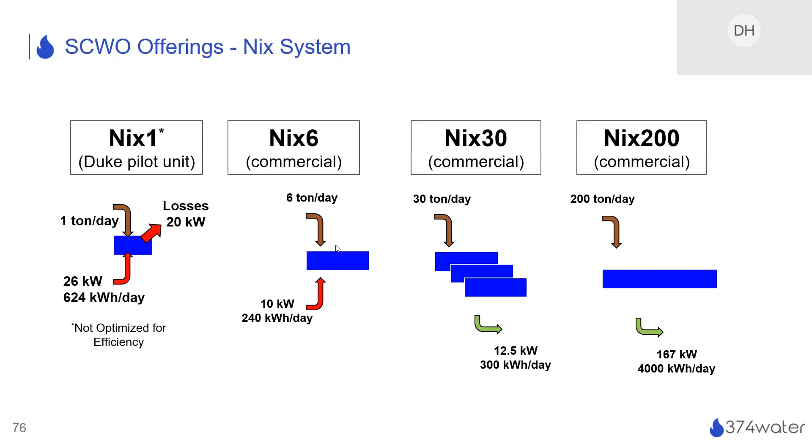The implementation of the SCWO unit is very simple. It takes up very little space and can be put into an existing wastewater treatment plant process train. If it's going to be treating the biosolids and sludges, it can replace active aerobic digestion, and it can even replace and is looking to be more promising than thermal hydrolysis. It takes up a very small footprint and can be placed anywhere on a waste source site.

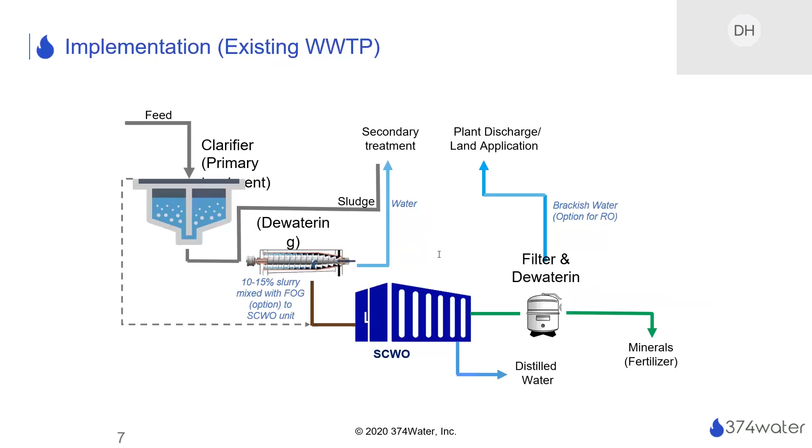There'll be a picture showing a comparison. In the blue circle, you'll see 3 SCWO units, 3 Nix 30 units, which would replace all the items X'd out here for handling the biosolids. So you would save electricity from those units, reduce carbon dioxide generation from the electricity consumed in the operation of those units, see a significantly smaller footprint, and also be creating electricity as well.

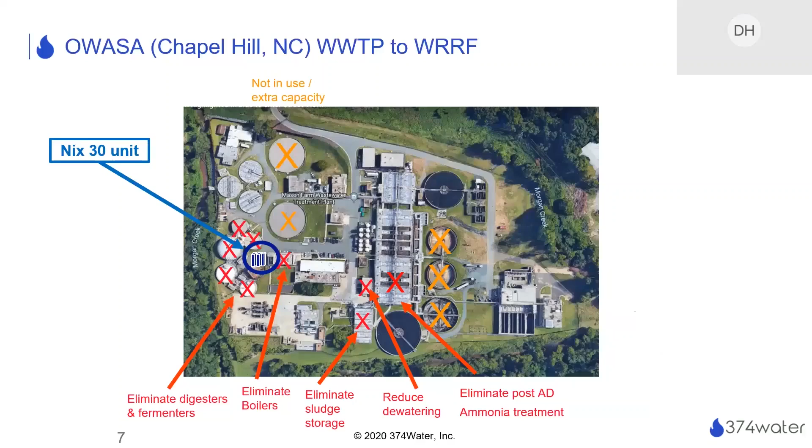That is 374 Water. Thank you.

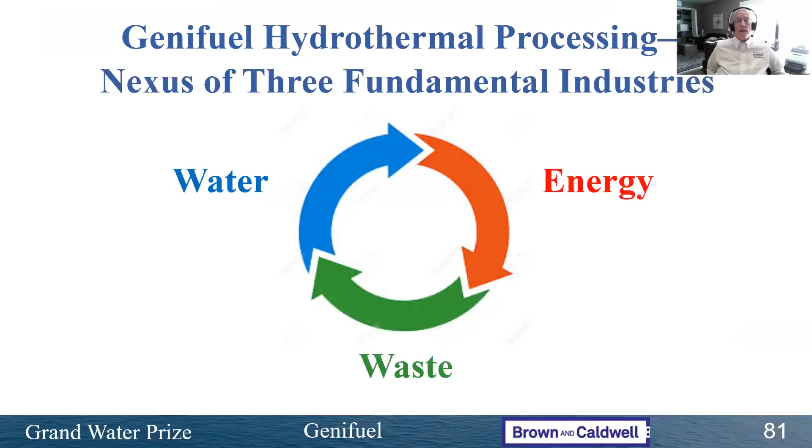The process is very similar to the way fossil fuels were formed, where you have wet organic matter, and over millions of years with temperature and pressure, you form liquid and gas hydrocarbons. We do the same thing exactly, but in about 1 hour. It's a hydrothermal process, wet and hot, 350 degrees C and 21 megapascal or 200 bar, and the conversion is complete as described.

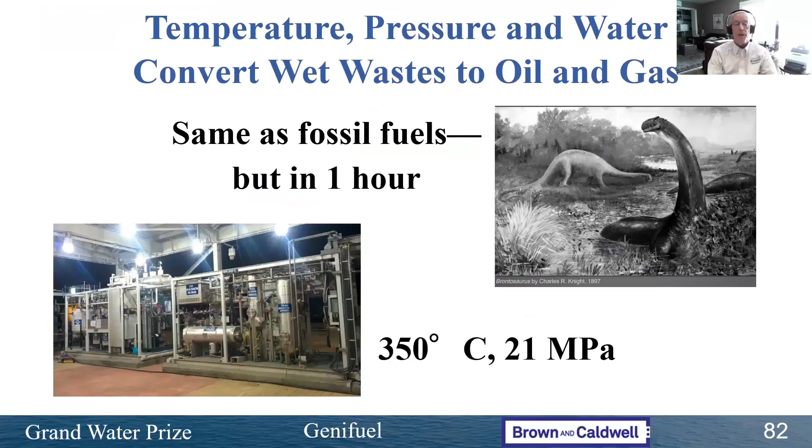This technology was developed by the U.S. Department of Energy at the Pacific Northwest National Laboratory, and we've been partnering with them for more than 10 years to bring this to market.

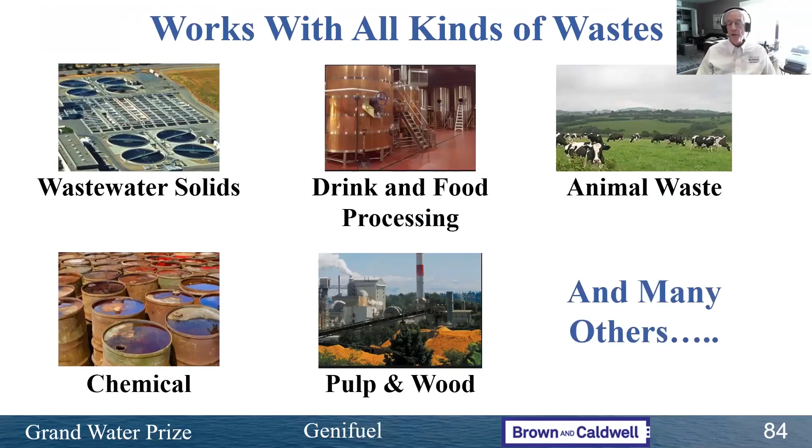The outputs of this are a biocrude oil, which looks just like petroleum crude, and a renewable natural gas, which is methane. The biocrude is refined at a conventional refinery into diesel, gasoline, and jet fuel, or any other product that a traditional refinery outputs. It works the same way, and the renewable natural gas can be put into a pipeline.

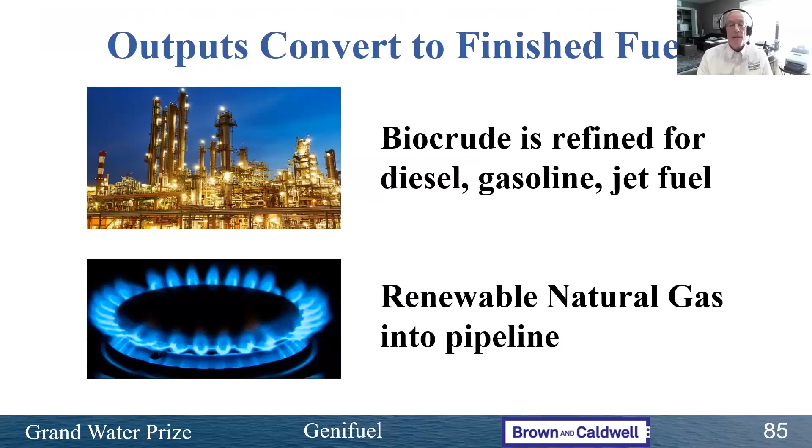The particular project we're working with for this prize is the city of Anacortes, Washington, in the northwest corner of Washington State. It's a utility serving about 17,000 people. Currently, Anacortes is using an incinerator, a fluidized bed incinerator, to dispose of their wastewater solids, and the city wants and needs to replace this with a hydrothermal processing system.

Our refining partner, since the biocrude oil is refined, is Kern Oil and Refining in Bakersfield, California. One benefit of this refining step is that by producing renewable transportation fuels, these outputs are eligible for both federal and state programs which provide tradable credits, sometimes equaling more than the original cost of the fuel, at the federal and state level. So those are all available with the fuels produced by our process.

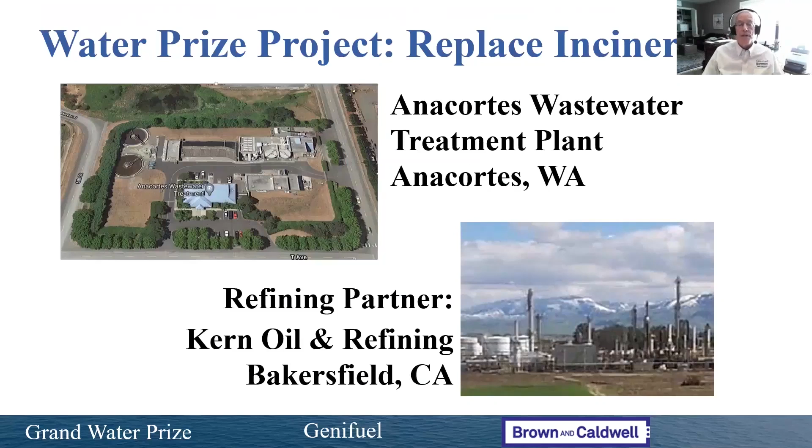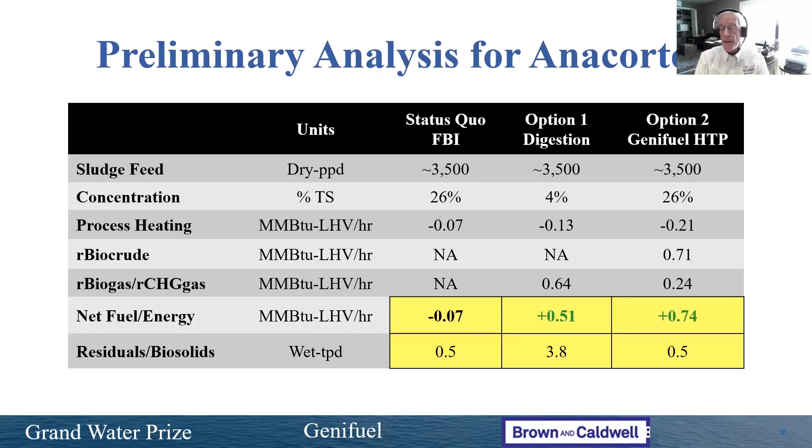Next slide. So here are our two partners in this. Our third partner couldn't be on today, and you're welcome to contact either of us if you would like further information. And that's it. Thank you very much.

Thank you, James. Oh wow, I didn't realize we were already at the end of our second panel. So we're now up for another audience Q&A. At this time, Catherine, I can't tell if there are any additional questions. I don't see any. Presenters, you did a great job. Oh, I think I just saw one pop up.

So there's a question for Genifuel: what is the scale of the systems your process functions at? Yes, so it's highly scalable. We have built systems all the way from bench scale up to current systems being designed and constructed now that are processing about 10 wet tons per day, and they can be scaled up further. It's highly scalable, and at this point we don't know the upper end. We project somewhere between 50 and 100 wet tons per day per system, and then modules to go beyond that.